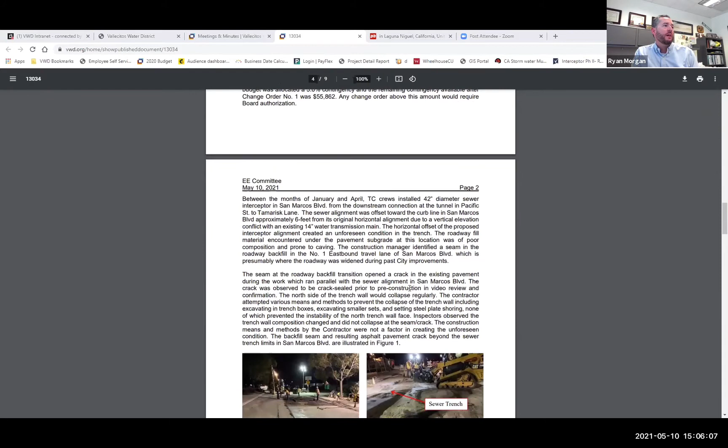Working in San Marcos Boulevard was a bit of a challenge due to the soils in the boulevard and traffic control. We performed night work on San Marcos Boulevard to mitigate traffic-related conflicts during the day and for public outreach and things like that. But one thing in specific was encountered in San Marcos Boulevard with the groundwater and porous soils.

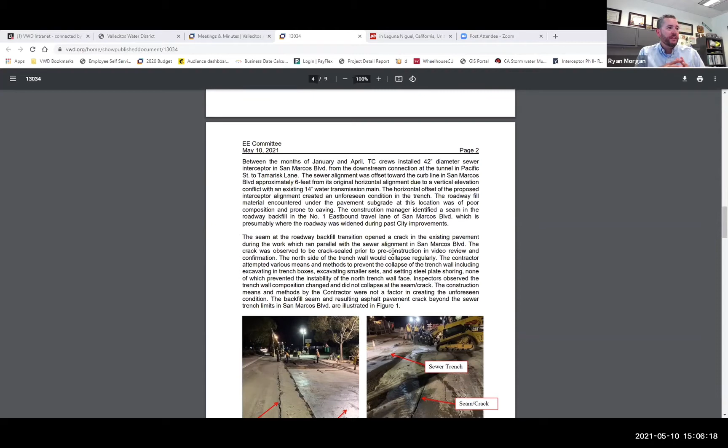It was noticed in the pictures on your screen that there was a seam that opened up in the roadway, a crack developed where there wasn't one before, or it was crack sealed in the pre-construction video. This crack migrated longitudinally down San Marcos Boulevard from Tamarisk to Pacific Street.

We think it was the joint in the road where it was widened back with a past city improvement project, so there was a distinct change in material and subgrade at this location. This created a problem in the excavation and collapsing of the trench wall. Typically the contractor is able to shore up the trench wall and preserve it to the limits required to open up for the sewer installation.

In this case, the entire travel lane of the number 1 lane in San Marcos Boulevard eastbound was opened, unfortunately, and the contractor attempted to use different means and methods to hold up the wall to prevent collapse. They were unsuccessful.

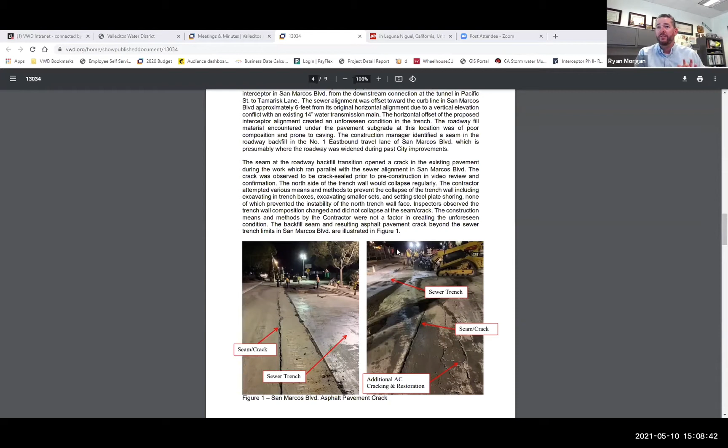This particular change order revolves around the surface restoration and the additional earthwork, excavation, and backfill in San Marcos Boulevard that exceeded our bid quantity.

That being said, we were looking at change order 2 in the rough ballpark of $136,000, which would take the total contract change order amount to 6.2% to date. I can report today that the actual change order 2 value will be about $88,000, which takes it to a total of 5.5%. So we're still going to exceed that 5% contingency.

We're still going to need board intervention here, or approval for this at 88,000. The 88,000 constitutes 4 or 5 different line items that are additional, including the AC pavement, which is the biggest, and backfill and excavation as well.

We do expect an additional change order number 3 to come in still in the coming months, because there was additional concrete removals and some manhole rehabilitation work, which we're still finalizing pricing on and making a decision whether or not to proceed with. But any amount of change at this point is going to exceed the 5% per the ordinance.

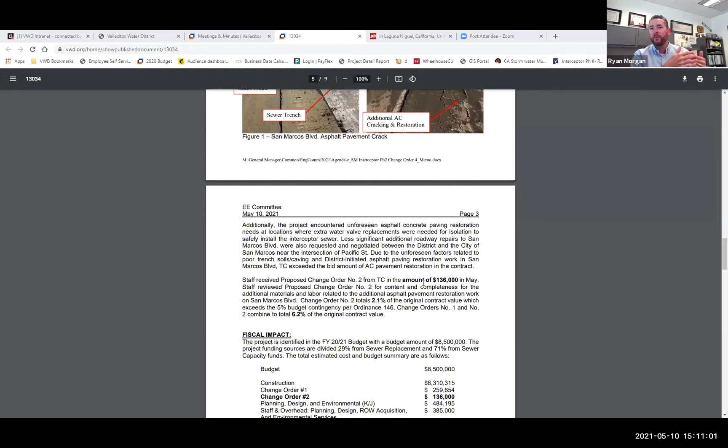As I mentioned, the fiscal impact is broken out a little differently. Change order 2, instead of $136,000, will be $88,000, or thereabout. We're still within budget, we still expect to finish within what's been budgeted, so we're not requesting any additional allocation to the budget at this time.

That will be flushed out in full once we know more about change order 3 and what's coming to close out the project. So with that, we will be seeking engineering and equipment committee support for this item to go to the board of directors on what will be the May 19th board meeting, for the authorization of change order number 2 in the amount of roughly $88,000.

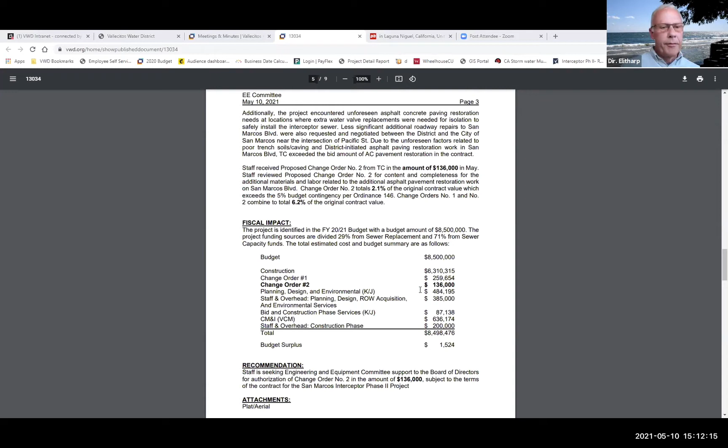And if there's any questions or discussion, I'd be happy to address that now. Okay, thanks, Ryan. Director Hernandez, any questions? You're on mute, Director Hernandez.

I'm still a little confused. Ryan said it was 88,000. I got 136,000. Is that differential explained somewhere?

No, when we were putting the agenda together, the estimate was 136,000, but we were still in negotiation and still verifying quantities with the contractor, and we didn't have it as of Thursday. So we knew we'd be working on Friday, maybe even Saturday, to get the real number. And the number came in lower once we verified, checking our notes and our inspector's notes.

Some of it was already in the scope for them to do. At the end of the day, it was less than we thought, but we put the worst case number up there because that's the only number we had on Thursday.

You're going to modify the report for our board meeting? Yeah, it'll be captured correctly in the minutes of this meeting, and then for the board meeting we'll put the correct amount. Very good, thank you. That's all I needed.

All right, we certainly have my support for this change order. I've found with large pipeline projects, the most challenging part's always been the street restoration. So I think this is commendable. You've held the change order amount in the 5 to 6% range. So you've got my support, and I'll defer to Director Hernandez for his support.

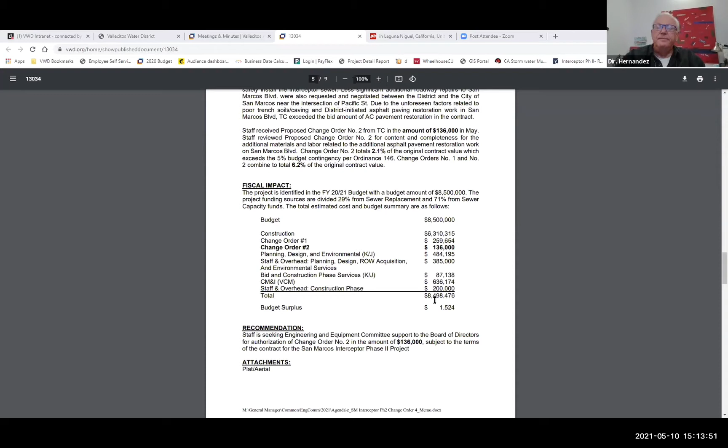Yes, absolutely. Okay, thank you.

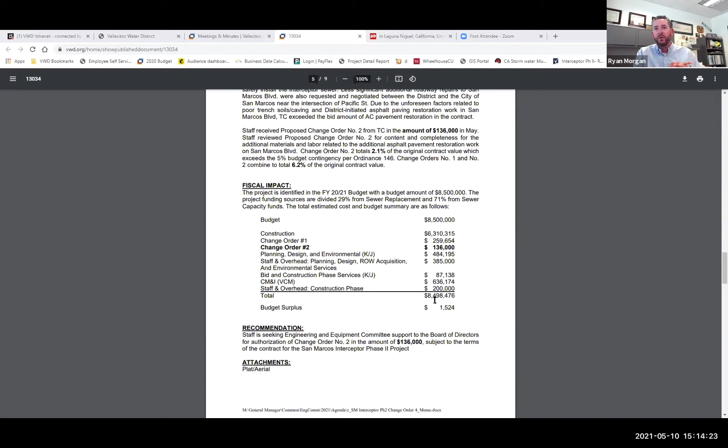Thanks, Ryan. And I'd just like to add that we know one of the best things we can do to leave behind is a nice roadway on San Marcos Boulevard. It's very heavily trafficked. That's one area we didn't want to cut any corners in. We actually took some areas that were damaged, not from our project, but we negotiated with the city because they wanted us to go ahead and make that repair now, and we agreed. So the goal was really to leave the boulevard a better place than we found it when we started.

Yep, absolutely. Oh, good. Yeah, and even though the finished paving isn't done, it was nice to get that extra eastbound lane opened up on Friday. All right, okay, thank you.

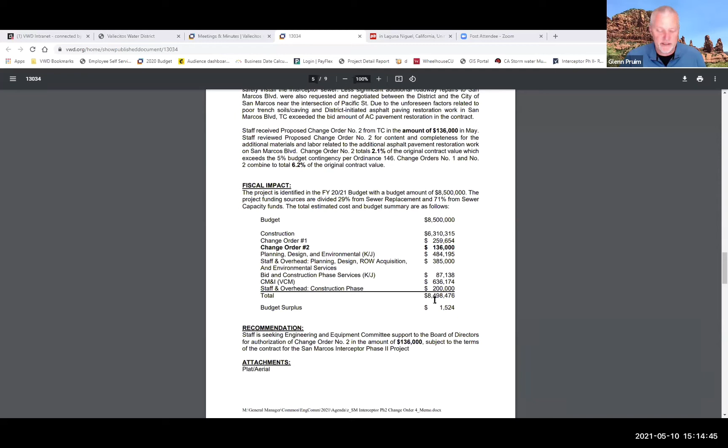So this item is the Las Posas water line replacement project. And I think this is the first water main break that we had when I started back in late 2016. I don't remember the exact date for this one. It was probably November or December of 2016, something like that. And now we're getting around to making final repairs here.

Is this the one where the cable company skewered the pipeline? No, that is not. This one actually, it was a pipeline break at the trapezoidal section right there, right when General Manager Prum started actually.

Okay, and this is the one where we had to get our crews. And it was so deep, and we didn't have the equipment. We actually had to widen the road and bench our equipment in down below the road surface to even get down to it. So we put a quick repair in. I'm stealing most of Ryan's thunder here, so I'll stop. But we put a quick repair in just to get us by, and then we're going to schedule for a full repair later on. And then with budgets and then COVID, we just kind of pushed that project back. But you'll see from the pictures, we'll probably have to get to it because it's kind of a ticking time bomb. Sorry about that, Ryan.

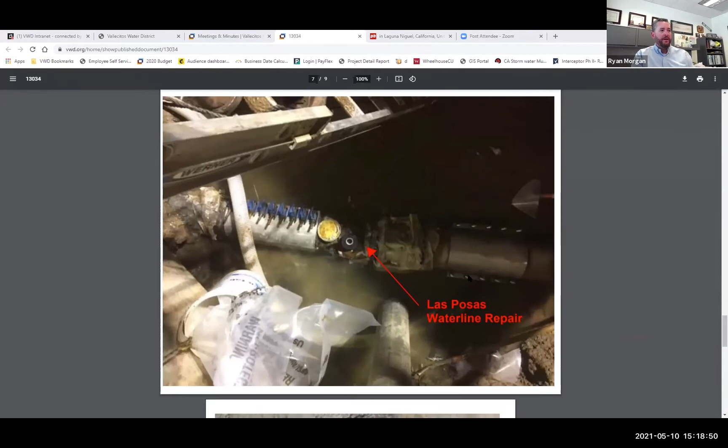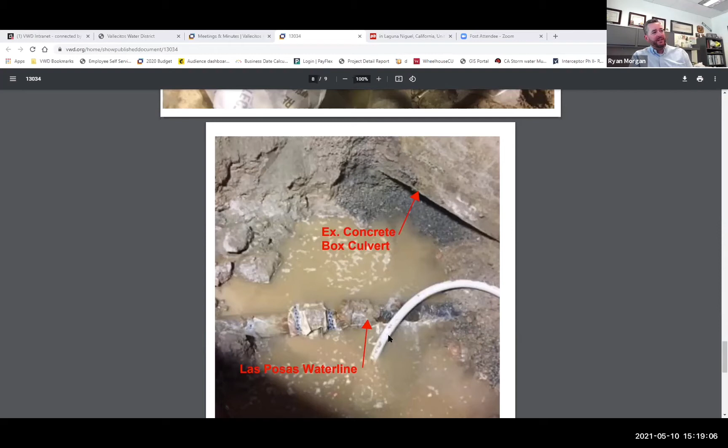So here's some pictures of the repair, Las Posas waterline repair with the clamps James was mentioning. And this one here actually shows the culvert and how it was beginning to be undermined. And the ductile iron, which in my understanding is not in the best shape.

That being said, we've already drafted an RFP, and we've invited two consultants on our as-needed civil engineering rotation list. We have requested letter proposals for design and professional engineering services for design and bid phase services. We expect to receive those proposals at the end of May, and depending on the fee associated with those proposals and whomever we select, this item may be coming to the board in June, probably by the June 16th board meeting, seeking an award for that PSA or that task order.

This is just an informational item for the committee about what we have, probably the next engineering design award that we have going to the board. So this way the committee is aware and can also ask questions.

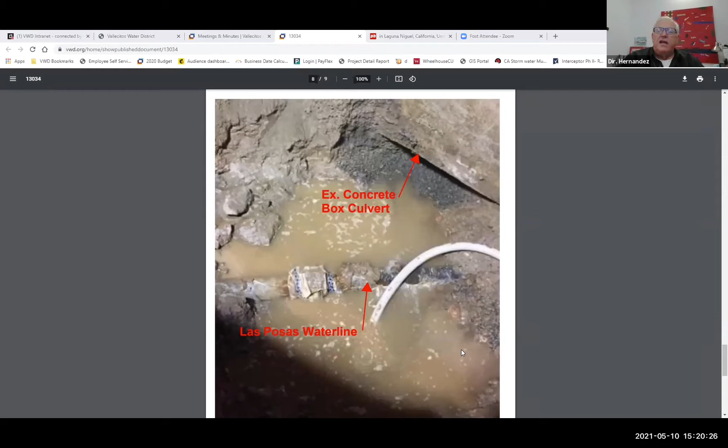This Palos Vista Drive, where is that at? Yeah, that's a typo, we actually fixed it, and I believe the wrong one ended up getting posted. It's supposed to be Las Posas. That's Las Posas, and that's Las Posas in Linda Vista. That building by itself is a Grainger. Yeah, that's right. No, James, I thought that was the case, but yeah.

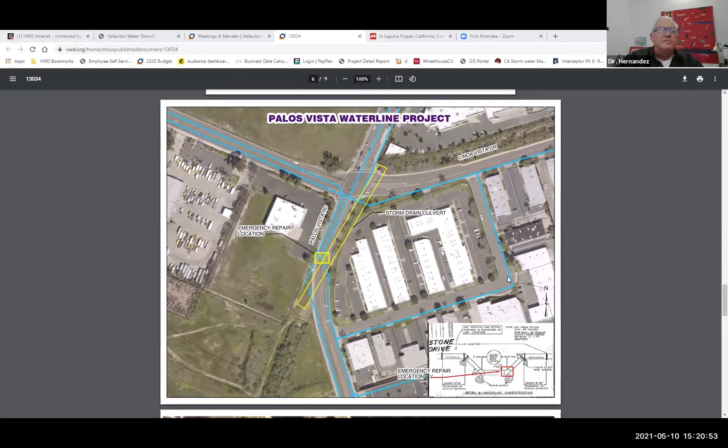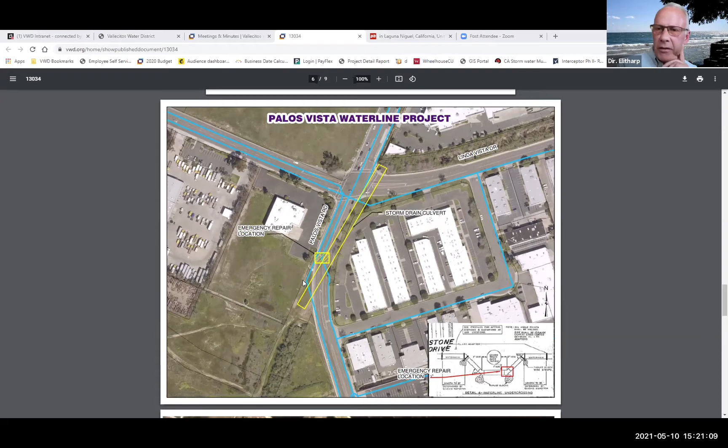Sorry, Director Elitharp, yeah, I was thinking of another break, wasn't there an issue with somebody boring underneath in the same area? Yeah, this was a little closer, maybe it was a sewer line. No, it was a sewer line, but it was a little closer to the movie theater. The dry utility contractor bored right through our water line and our sewer line, but they end up paying. We got a contract out there, and they end up paying 100% of that fix. Gotcha, that's the one I was thinking, that was that one. That was just down the road, just a little further to the south. Gotcha.

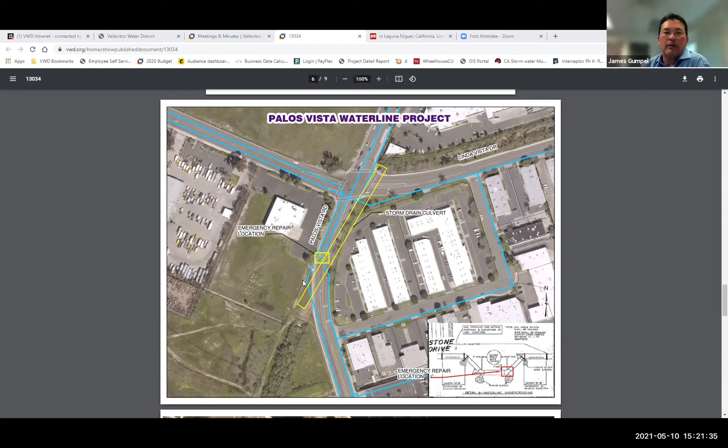Yeah, so the next item is an overview of our GIS system. It's obviously an essential component of our asset management program. So I think Susan's going to kick us off, and then she's going to maybe turn it over to Paul Cosmano. So Susan, why don't you jump in?

Great, thank you, General Manager Prum and directors. We are here today to give you a little overview of the GIS system. It's a critical component to the district's ability to understand the assets that we have and where they're located. Joining me today are our two GIS technicians, Paul Cosmano and Dan Lopez. They're going to be giving you the demo after I run through this PowerPoint real quick. So Paul, if you want to go ahead and share your screen.

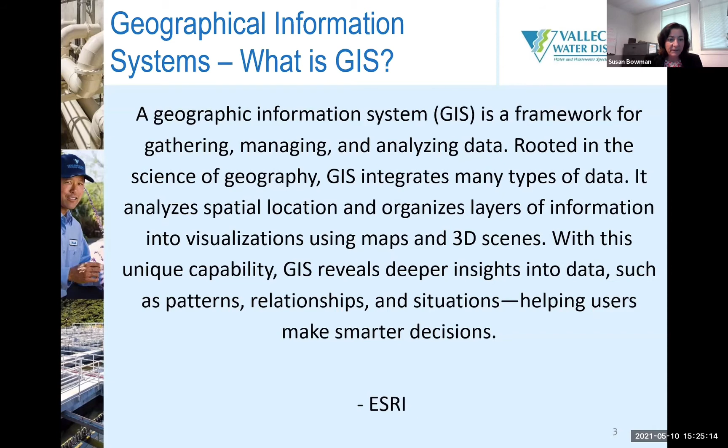So again, GIS gives us better insights into the data here at the district, a better way to see our assets and understand where they're at. It's really just a critical component to being able to provide our services to the customers. So next slide.

Okay, so where does it fit into the overall asset management concepts? This is a slide that I've used to bring together what asset management is and what the different components are. This GIS system really is part of the first two components of what asset management is.

What do we own? What are our assets? As we were talking about in the previous presentations, we need to know what we have, and we need to know where it's located. Majority of our work is field work, on the water and sewer lines, not within fence lines, although within fence lines of a treatment plant like MRF we do have GIS. Primarily GIS being a map-based system, it tells us where all of our assets are located very precisely and how they're related to each other in how the system flows, collecting water, delivering water.

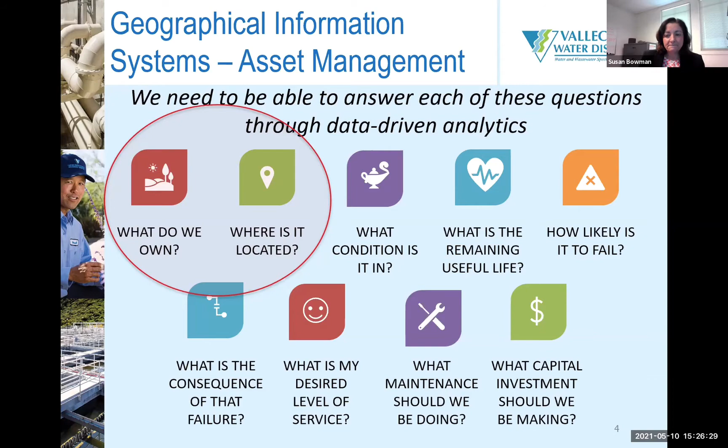Next slide. Okay, so again at the district, the base maps we use, the primary maps, are water and sewer atlas maps. That's just the term we refer to them. Paul and Dan will be giving you a little glimpse of those. And then we have other applications that are targeted towards specific aspects of our business.

Meter reading map—Paul's going to show you what we're doing with meter reading. The division map, where we show the different directors' coverage of their districts. We have a main break layer put in place to help understand where main breaks are. We have applications that help our maintenance crews execute maintenance and keep track of what they've done and where. Some of these pictures here, the yellow pins, you'll recognize are from...

...the soil analysis work we're doing down in San Elijo Hills. And on the left there in the purple colors are where we had done some risk analysis of our ductile iron pipe that we were just talking about—risk analysis of different areas around the district so we can focus our condition assessment efforts. But again, these are things used throughout the district. Everyone needs it to accomplish whatever aspect of their assignment.

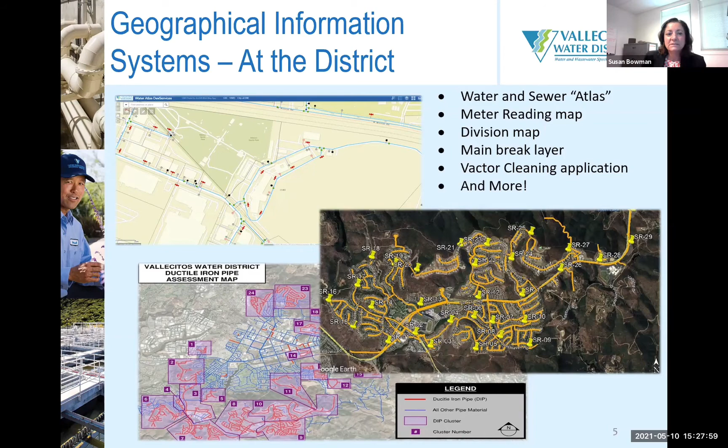So next slide. Okay, so future efforts. What we're looking to do is expand accessibility to the GIS system through mobile access and integration with Maximo, our maintenance management system.

Currently we have our assets in the GIS, and the assets are also recorded in our Maximo maintenance management system. This next year, we're going to be identifying the core needs to integrate those two systems together so that an asset in GIS is updated on a nightly basis to the assets and maintenance history in the maintenance management system. So that's a big effort we'll be undertaking.

And with that as well, it'll allow us to get GIS out in the field to all of our field workers. Currently, supervisors and certain other groups that are very heavily GIS-based do have GIS access in the field, but moving forward we'll be giving that out to everyone on multiple devices so they're able to really track their work and understand where our assets are located.

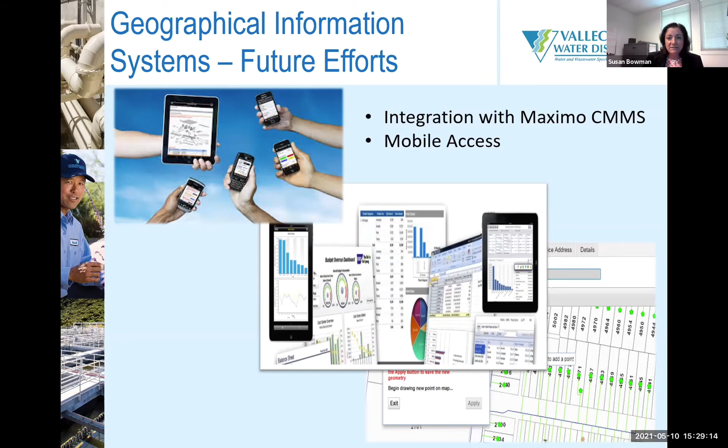So next slide will be our demo. At this point, I am going to turn it over to Paul and Dan. Paul's going to show you some of the tools we have on the water side, and then Dan will wrap up with some of the applications on the sewer side. Okay, thank you, Susan.

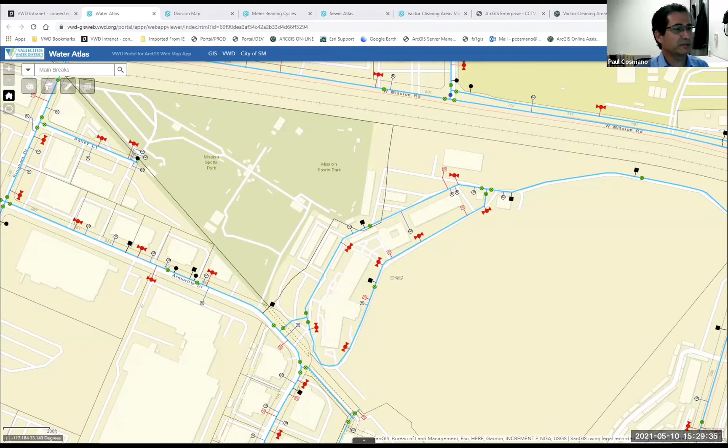Everyone can see the district site map? Okay, this is a portion of our water atlas map.

What we do is we're showing all our facilities, both in the office and out in the field. Every appurtenance in the system, pipe, valve, meter, whatever, has data associated with it. As you can see in this pop-up, this is the data associated with the water main I clicked on. We do have links to the as-built, which can only be accessed indoors at present, but we're working on getting that access mobile. So all the information in this map, whether it's a fire hydrant or a meter, it all has data associated with it, and we can click on it and quickly find it.

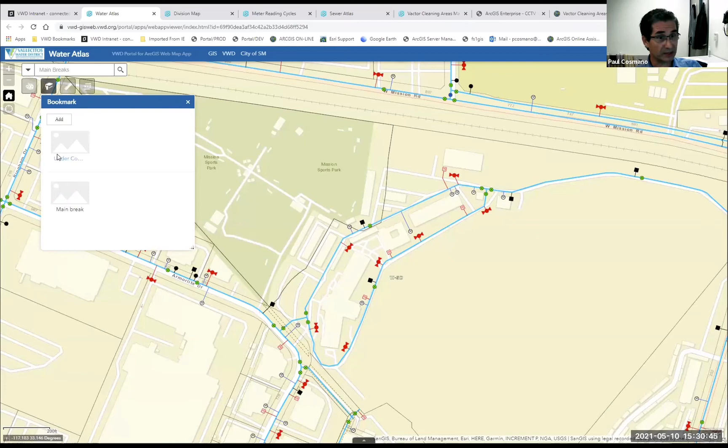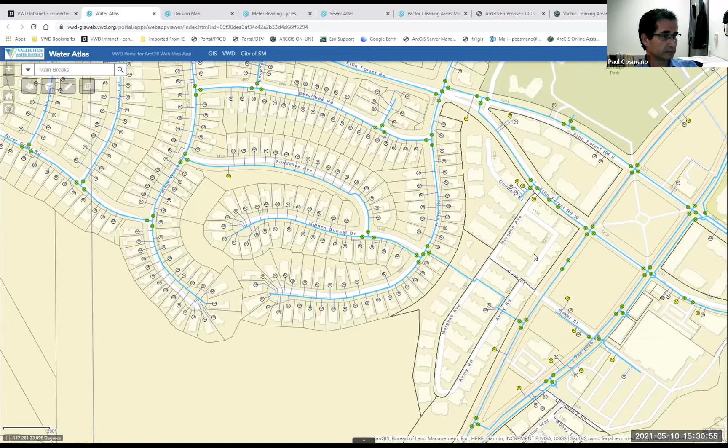Also, we do have the main breaks layer that we just added. It shows it's fairly recent, with the exception of the one we had the other day, and it also has that information. As soon as it shows up here, we'll click on one, and it'll have the lat-long information of where the main break was located. You can see here the cause, main break, lat-long location, the pipe material, and even the soil type.

So that's pretty basic. We have quite a few layers, only some of which are turned on. We have access to quite a bit of information that the end users can use.

The other map we have, this map is internal only, so only district employees can see this map, no public access.

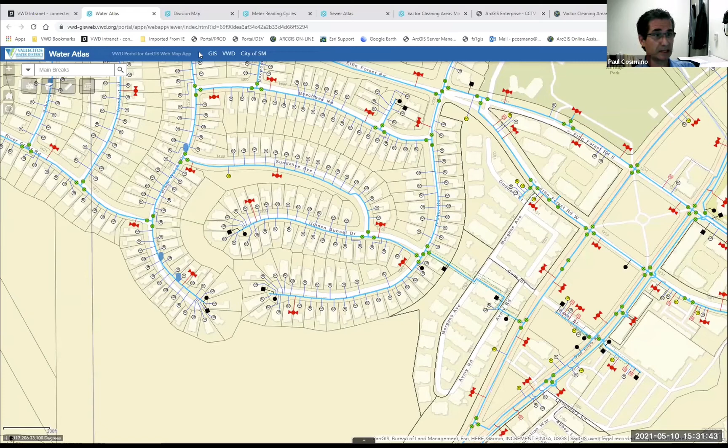This next map, the division map, can also be seen by the public. When they go to the district's website to open it up, they'll get this splash screen. It'll show them instructions on what to do and how to find their board member.

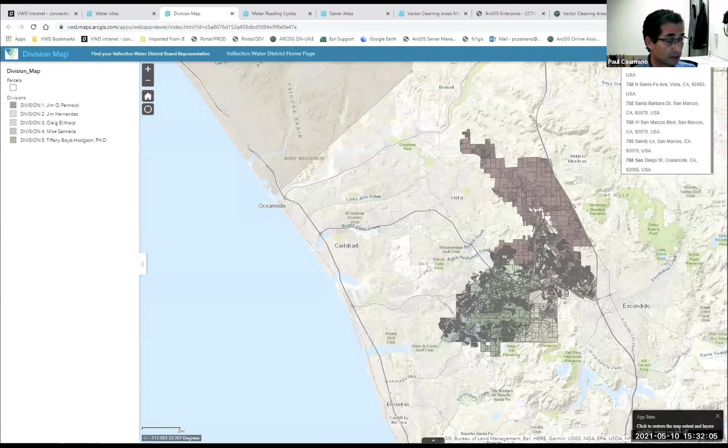Basically, you go up here, type in your address, for example Boulevard, and it'll zoom you to the location. You just click on the screen and it'll tell you the precinct they're in, the division number, and the board member's name. Again, this is a public-facing map.

One of the other maps we have is the new map we just put out about a week ago. It is accessible to the public now. This is for finding, since quite a few residents are asking, when their meters are getting read. So we created this in conjunction with the meters department so that anyone can find when their meter is going to be read at any time during the year.

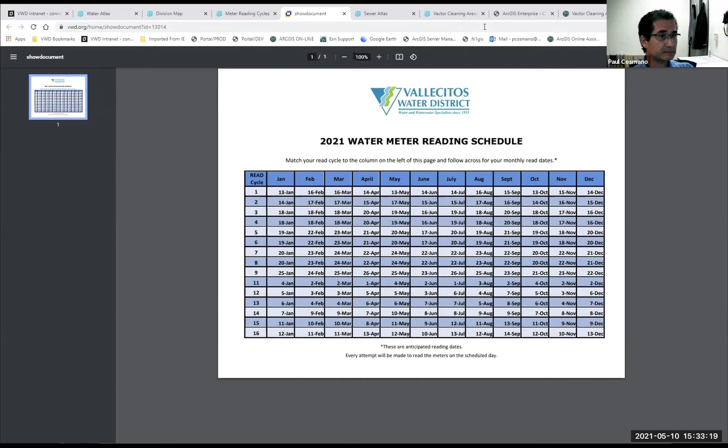And that's all I have. So I will go ahead and turn it over to Dan, and he will show you some of the other maps that we have.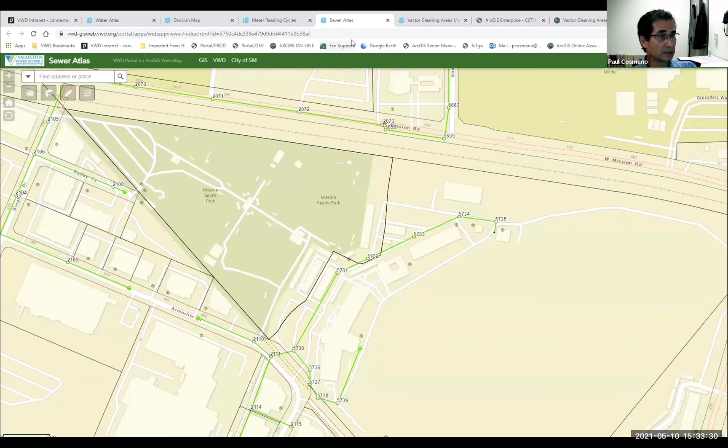Hello everyone, I'm going to quickly talk about a few other web maps that we have. They're available to district staff only, and these are typically on a desktop, but they're also available on a mobile device. I'll talk about that in a minute.

What you're looking at is very similar to what Paul just described in the water atlas, except now you're looking at sewer mains. If you're familiar with the area, you'll notice that's the district sewer mains that front the district office, and then the surrounding areas as well.

If you'll notice, the sewer mains and then the manholes are labeled for reference. If you click on a sewer main like this, you'll get all the pertinent information associated with that sewer main: upstream, downstream, elevation, invert, diameter, length, things of that nature. So it really gives everything, all the information, to the end user, including a link to the as-built itself.

And so there's the information for the sewer main. If you were to click onto a manhole, you would get similar information, all related, of course, per the attribute associated with the manhole.

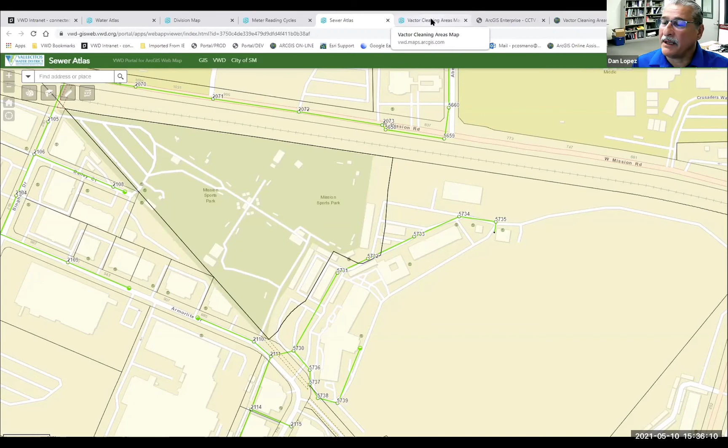That's it for the sewer map in a nutshell. Let's go to the vector cleaning map. The vector cleaning application map is simply a mobile application used out in the field by the collections department. This particular map is used for vector cleaning tracking, if you will.

You'll notice the two different colors on the screen - the sewer mains that are green, and then there's some red ones. The green ones, for the purpose of the vector crew, indicate that this sewer main has not been cleaned. Once they vector clean it, it will change colors, as you see here. You click on that and it displays all the different attributes regarding that sewer main - when it was cleaned, the date, the operator, truck number, things of that nature, which they use for tracking purposes that they have to keep track of. This is part of their yearly routine of cleaning the district sewer mains.

So Dan, yes, it resets every year. So those green pipes may have been cleaned a year ago, but then it resets. Correct, every year. Okay, correct.

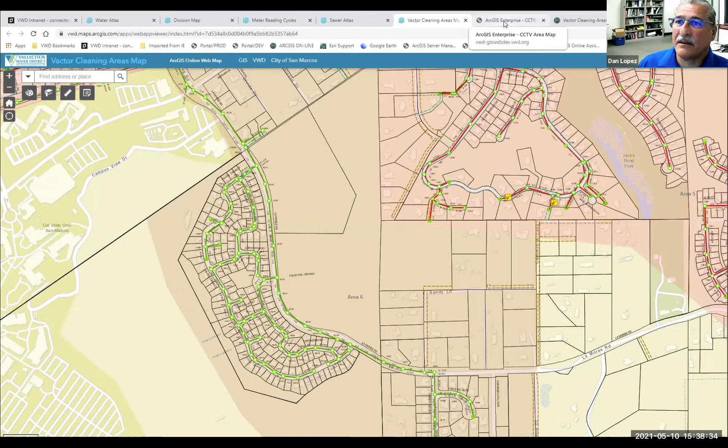And we're going to go to another map, which is similar to the vector cleaning map, except this is for the camera crew. It's a CCTV application, again in the collections department, but this is for the camera crew. So what we've done here, the green specifies all the typical information that you get on the sewer atlas. This one, because it's green, it still stays green, meaning it has not been cameraed.

Now, if you were to click on it once that sewer main is cameraed, you will get the additional information, including when the sewer main was cameraed, when it was edited, who the operator was, the footage, and things of that nature. In the near future, users will be able to link to the actual video of that sewer main.

Again, this is for tracking purposes, so it helps them track what's been cameraed. The district archives those videos, and we're in the process of having those videos available to the end user, primarily for the collections department. So that's pretty much it in a nutshell on that one.

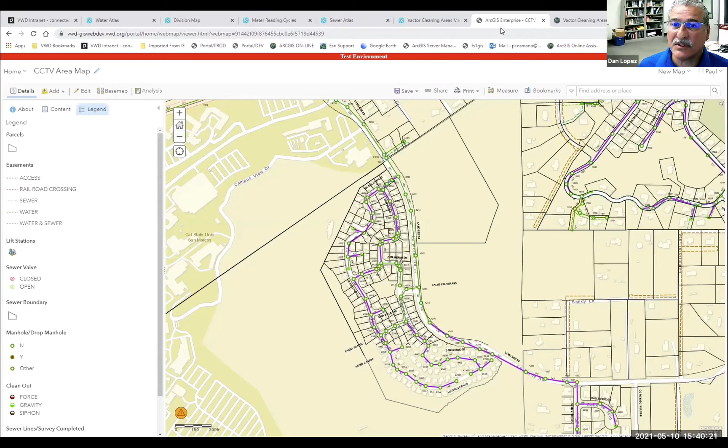Are there any questions? I do, Susan. I didn't see the first page - is there a legend of what the symbols mean so the public can go and see that a round circle is a manhole, one with a cross through it is something else?

So the public doesn't have access to the one screen that has all of our appurtenances and all of our assets. There's some public access to that information though. On the public facing maps, there's a legend on the left-hand side of the screen that tells you what the colors and lines are. They're very basic for the customers. I figured as much. All right, thank you. You're welcome.

Okay, well, thanks, Susan, Paul, and Dan. Very informative. I can tell you from experience that having access for the field crews to the as-built is extremely valuable and helpful. So that'll be a great feature.

Currently, we download the as-built onto their mobile device, but it's not live. This is all part of that integration that the committee has seen, how we're moving asset management along and bringing that computer maintenance out to the field. GIS is an integral part of it, and as the guys already stated, they'll be able to click right on it and see the CCTV or the pertinent information. It should make workflow and gathering accurate information a lot easier for them.

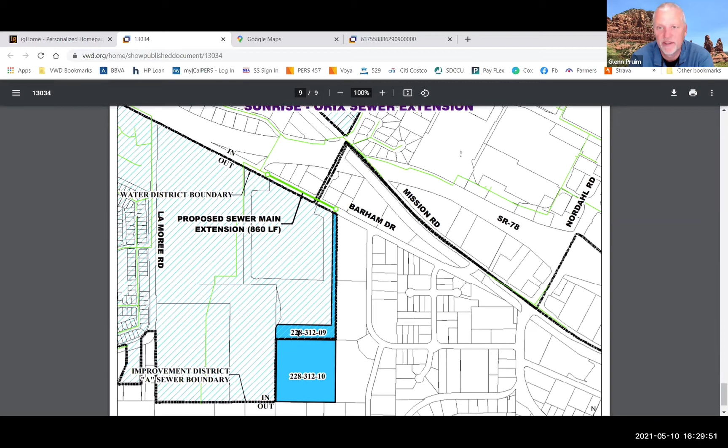Well, if it's okay with the committee, what we'll do is try to get a better idea of the cost. So if we were to explore this alternative where we maybe look at helping pay for the upsizing, we can sharpen our pencils and get a better idea. But from a timing perspective, I'm not sure when the developer is going to want an answer—sooner or later they need to move forward or not.

Okay. James, is there anything else you needed? No, part of me was hoping for James to just say go in this direction, tell the developer this, because it makes my life easy. But we'll go ahead and sharpen our pencil, and we'll probably be bringing this back to you next month, because I think the developer wants an answer.

So I think you can tell them what we're leaning toward, and that's that we're going to sewer them, and that we're interested in maybe some kind of upsizing scenario. It becomes a cost issue—I know the developer's consultant is very reasonable, but I believe the developer wants us to pay for the whole thing, and I've already said a hard no to that.

Yeah, there's no justification for it. You can tell them that again.

Okay, I'll work on some numbers with Glenn, and depending on the timing, we'll see. You'll see it at the next committee, if not before.

Before you go, James, would you also look at what a bond amount would be that would, if you only got 25%, and you have to go after a bond, what number of bond you would look for, and say okay, give us a $10 million bond, and then we'll know what we're doing. Yeah, I will, but you can't hold bonds to perpetuity, that's one of the problems, right?

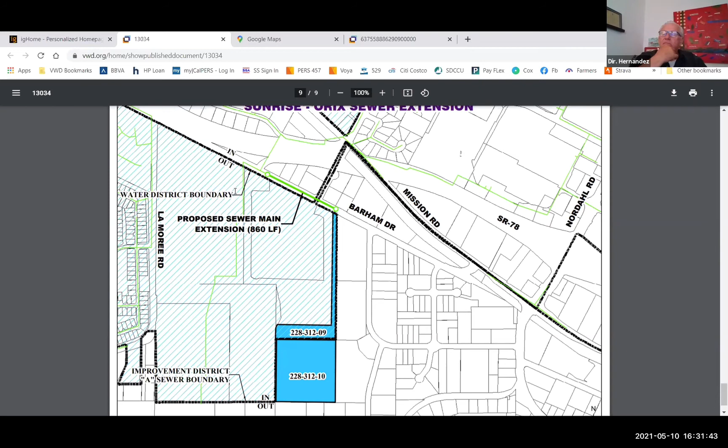So you could hold surety, like notes and papers and real cash, so to speak, to perpetuity, or you could put something in escrow, but you can't even keep something in escrow to perpetuity. It has to have a sunset date. So the problem is the sunset date. So you could have a $100 million bond, that bond's going to have a sunset date, because nobody's going to give you a bond for, let's just call it $1 million, that goes off forever.

Okay, so it becomes kind of a non-issue with that, because we did explore that, Director Hernandez. All right, okay, yep, all right.

Go ahead, there's one more item left. Yes, one more item left.

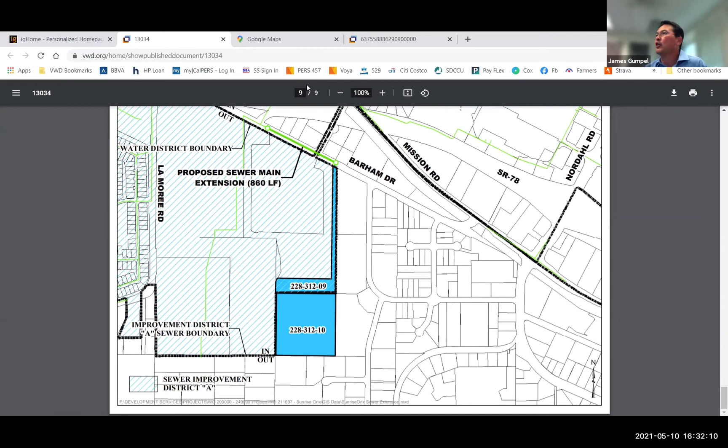So the urban water management plan, and since I'm sharing, I'll continue to share. Hopefully the committee is aware, if not, our urban water management plan final draft is online. We've advertised in the newspaper. We're gearing towards the public hearing, which will be in the first board meeting in June, which I believe is June 2nd. So that's going to be a busy board meeting, because we're going to have hopefully a budget adoption in the first board meeting in June, and we will have the public hearing for the urban water management plan.

Now, the good news is the 2020 urban water management plan is significantly different than 2015. It's different because of statute and state regulations and rules, but also because our water supply outlook is significantly different.

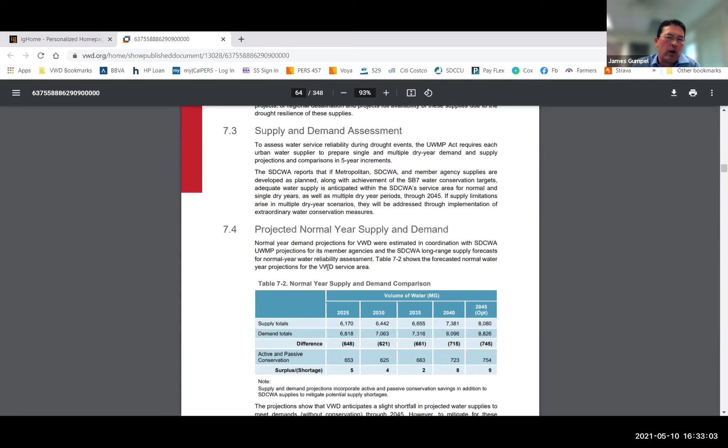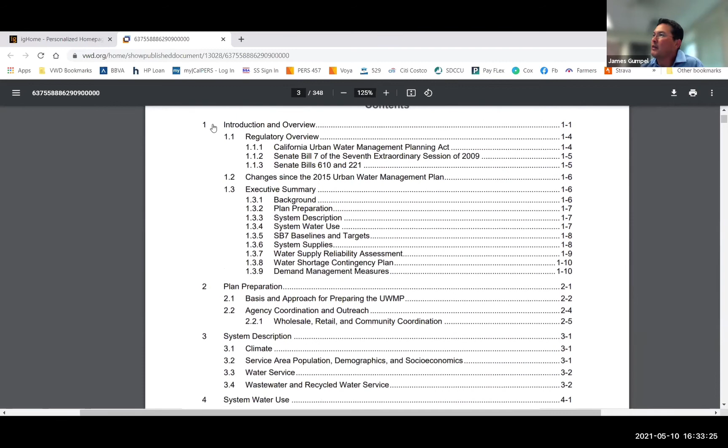The new components to it, I'll kind of jump back and forth, this is what it looks like, so everybody can see, let me zoom up a little bit, hopefully give you a bigger picture. And then on our table of contents, it's basically the same type of table of contents as every other urban water management plan, with the water system being chapter 4.

Our SB7, or basically our gallons per capita per day targets, being chapter 5. And as you may remember from 2010 and 2015, almost all agencies, at least locally, have no issues with the SB7 goal, which was initially put in by Governor Schwarzenegger, just to kind of date it back.

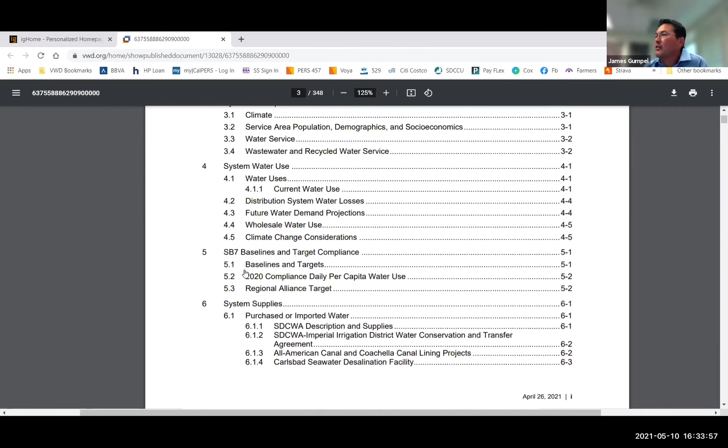System supplies are in chapter 6. Now for us, our system supplies is essentially water authority. So this is basically lifted from the water authority's draft urban water management plan, geared towards us for our numbers, and placed in. So we really have no additional say in it, because even our desal is a water authority supply, and even our water from Olivenhain is an indirect water authority supply, because we get the raw water from water authority. We pay for treatment services at OMWD, if that makes sense.

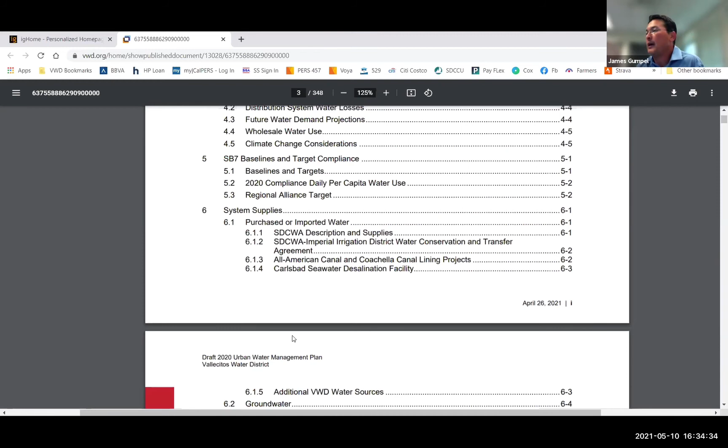So chapter 7 is really, as chapter 8 is our water contingency plan. So this is the part that's really new, but really it has to do with, and I'll explain where it affects us. But this is the part that's been kind of highlighted. So each urban water management plan update has something that they're really pushing forward, and our water shortage contingency plan is it.

Now the good news for our county is we don't have any, we don't have none, so it becomes a non-chapter. And when I go into some of the tables in chapter 7, which is our supply and demand, I'll go with that.

But what it does do, and this is something we'll have to bring back through the general manager to probably our PAP or P3 committee and to the board, is we do have to probably make some amendments to our drought ordinance, because we have a 4-stage drought ordinance, and the new water contingency plan and the new state regulation requires a 6-stage drought ordinance. So we have to go from 4 to 6.

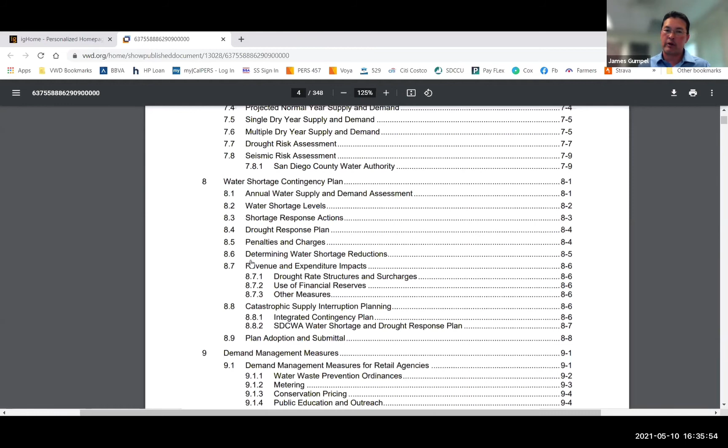It doesn't give you guidelines of what you have to do. It's just different triggers. Trigger 4 and trigger 5 may have nothing different that Vallecitos does, but you have to identify them because it'll match the state triggers if we go into a severe drought.

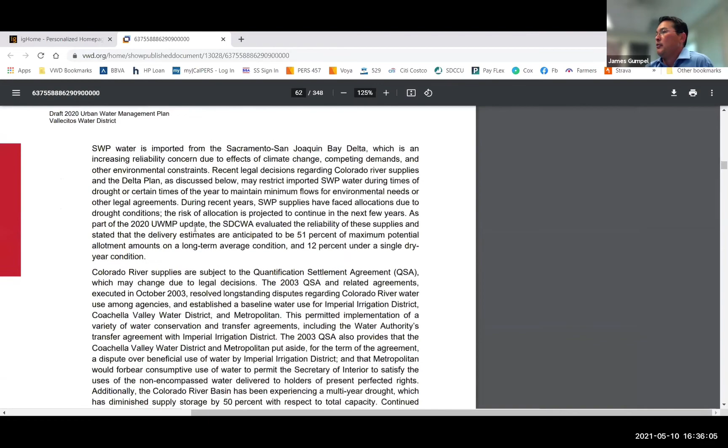Anyway, not to take up too much of your time, let's go into chapter 7, water supply reliability. I'll go right to a couple tables and explain them and the differences between them. Okay, table 7-2, projected normal year water supply totals.

2025-30, you can see the different years, water supply demands. Now I'm going to put in a note down here. There's going to be 2 notes, maybe 3 notes. I just got off the phone before our meeting started with the HDR consultant.

The water supply totals are given by Water Authority, and they include anticipated conservation measures, both active and passive. The water demand totals, provided through Vallecitos via our master planning and our own urban water management plan, do not include passive or active conservation measures. I'm going to put that note, clarify this, into 2 different notes right here, so people understand it.

This is the table that people complained about last time because it showed a 35% reduction. Here, it's more like 10, 12, 13%. So it's not 35%, the numbers are much different.

The third note I'm putting down is that the water supply totals are the projected totals. It's not actually what the Water Authority has for water supplies, because they have supplies above and beyond that. They're just saying this is what we anticipate based on conservation goals we want to hit as a region. So that gives us, on purpose, our conservation goals based on a non-conservation number to hit for our future planning, which dovetails into chapter 8 and chapter 9, the best management practices stuff.

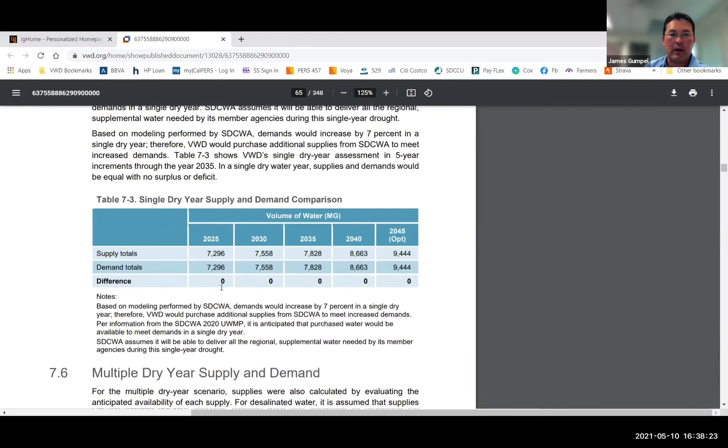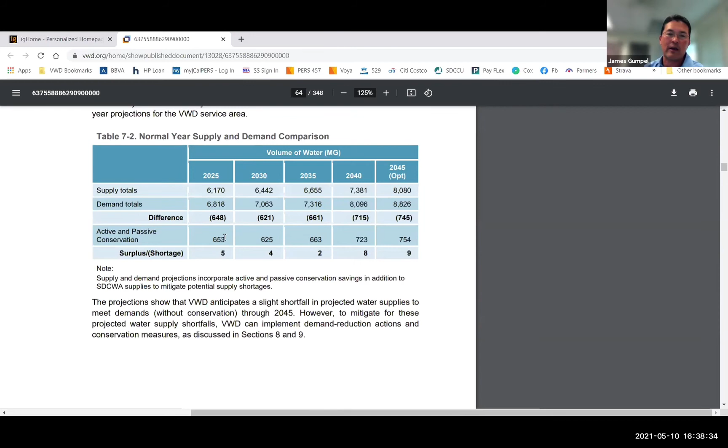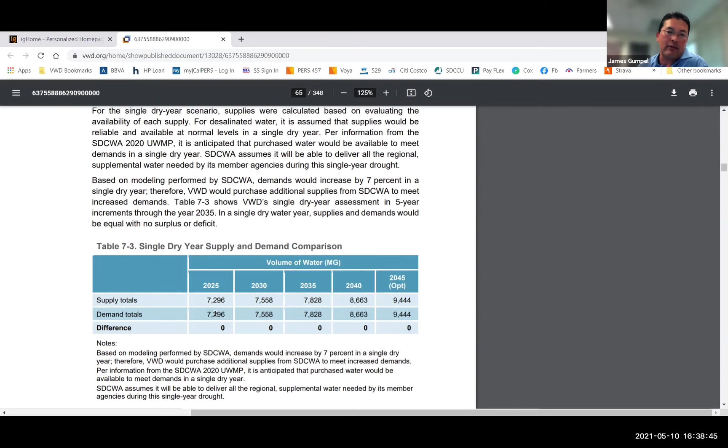So if you look at this number, it's 7,296. If you look at a normal year number, our demand is 6.8 and their anticipation is 6.17. So you can see we go up significantly, almost 1,000 million gallons. They still have supply for us, so the supply is there. This number is not an indication of the actual supply, it's an indication of what they anticipate supplying us, if that makes sense.

When we get into multiple dry years - James, yes, I got a quick question on the table above this one.

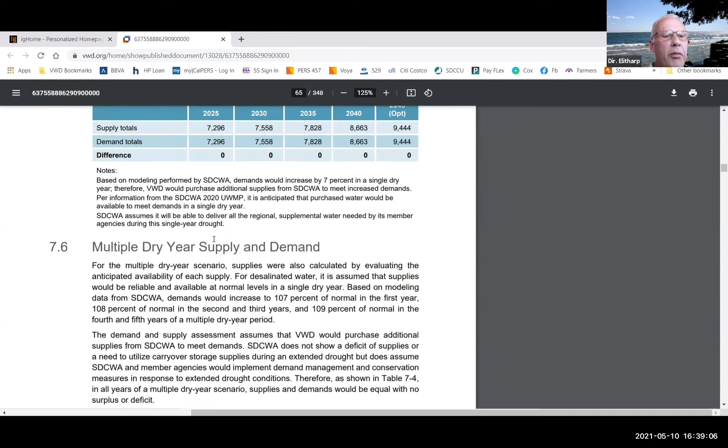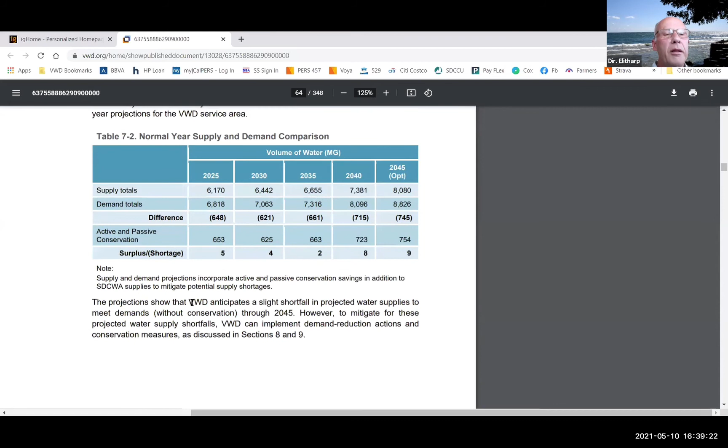No, let's go back down. This is the multiple dry years table. What's the table above? That's a single dry year, and the table above says normal year. Okay, I guess the normal year, yeah, that one right there.

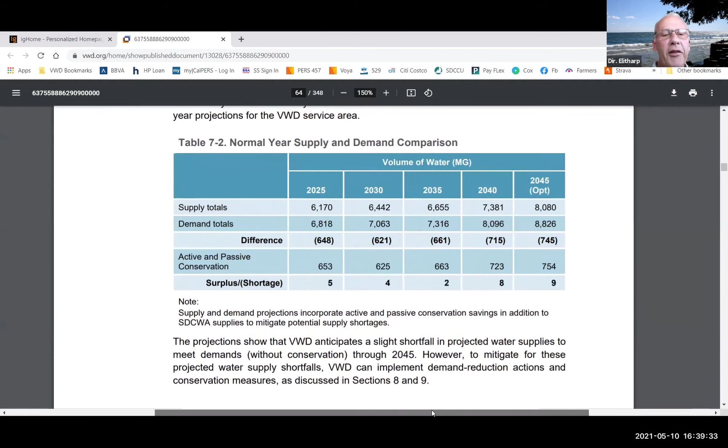So why wouldn't you just show conservation as being the 648? Why is there a small - I mean, what are the active and passive conservation numbers based on, and why are they different? They're just normal conservation that every agency does. So in other words, is that just a straight percentage on the supply total? No, I don't know exactly, I have to look into it.

CWA goes through a couple different scenarios to come up with it, basically looking at historical conservation numbers that each agency reports through its reporting structure and projecting it forward.

This is the table that you may remember people complained about. When it went to the state, Vallecitos did it right, while many other agencies had to show the deficit, because the intent of this table is to show the agency and the people reading it that you're going to have to do some sort of drought, passive and active water conservation, and here's a goal of what you're supposed to try to hit. The state came back to agencies that showed this as a 0 because water supply was available, or they projected their existing or projected conservation numbers into this number to make it lower, to make it 0.

The state says you're doing it wrong, because looking at this document you don't have an understanding of what amount or percentage of conservation you need to do. So that's why I'm going to take care of it with notes. Yeah, it just looks a little funny having surplus numbers in such small quantities, I guess.

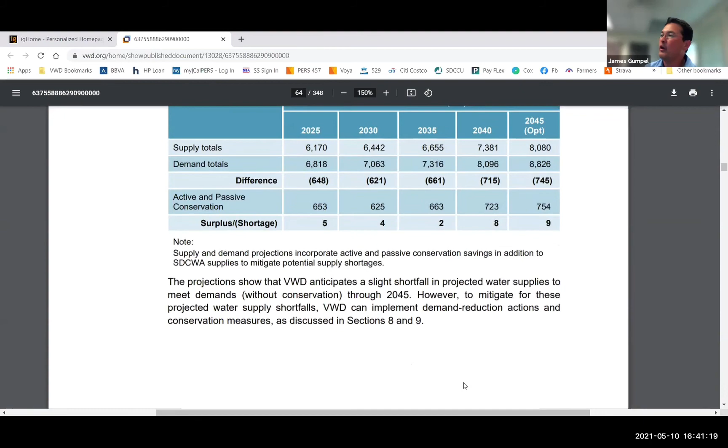It's really telling when you look at this over multiple years, as you can see our demand keeps going up, but the supply matches it perfectly.

Basically, CWA has different levers. If you look at their urban water management plan online right now, they're not even going to their highest lever, not even triggering a lot of their emergency statutes. They're so well prepared, according to their study, that even in the 5th year of a drought, they have abundant supply to meet increased demands without going to the next level of levers, getting water from groundwater basins and different emergency options they could pick.

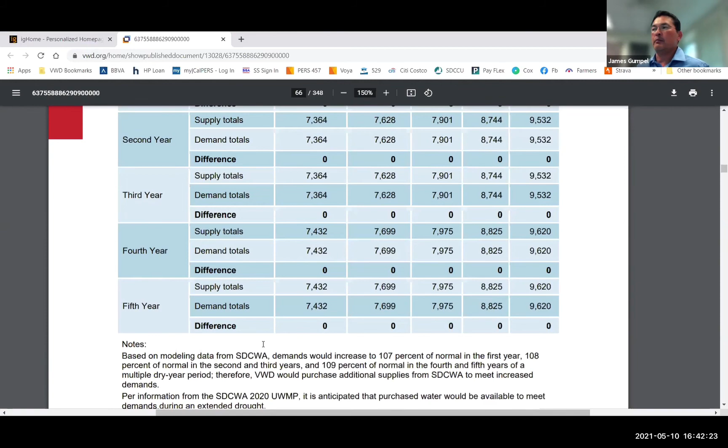So that's why the number is 0, because they're basically saying, that's what you need, we can match it. So the number will always be 0 the way the tables are set up. In other words, their number might be 9,000 for us, but they're just going to say we can match what you have. So that's really the majority of what I wanted to talk about, to show you that the numbers are starkly different.

This number up here showed like a 35% difference. The new numbers now, because your averages get to move with time, and now we have some of the reality of the recession and the past droughts within our 10-year average number, and it shows.

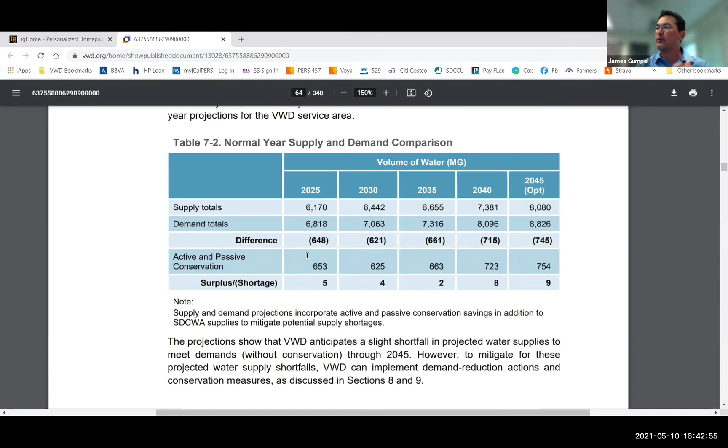Because remember, you have to base things on 10 years. If you go through the document, it'll talk about the increments and how the averages go through. It becomes clear that your numbers are based on these rolling averages, and you get to roll the average forward or back depending on what you're doing.

But at the end of the day, the message and the notes will show that there's an abundant supply. There's no water shortage anticipated by CWA, and even if we don't hit our conservation goals, the water supply is there. Not hitting our conservation goals may have other effects from a state standpoint, the carrot or the stick, but from a water supply standpoint, we have no issue.

That's all I had for this. If there's any questions, I'd be happy to answer them. The document is online. There will be a presentation at the public hearing done primarily by HDR, our consultant, to go over the document in more detail.

I wanted to give the committee just a flavor for where we are, which is basically the 2 main things I want as a takeaway: water supplies, according to CWA, are there, and considered reliable based on the statutes, and we don't have anything to worry about as far as our existing customer base or prudent, organized planning for future development.

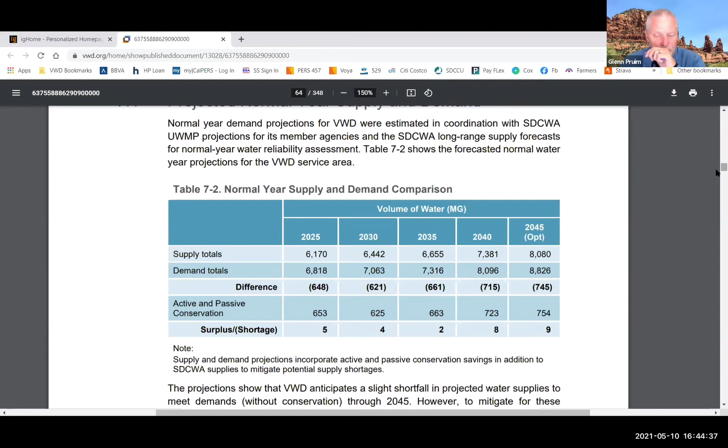And the second thing is, we will have to have some action. We will have to come back mainly for a new drought ordinance, because our existing drought ordinance doesn't meet the new statutes. At the meeting on the 19th during the GM report, I'll announce that there's going to be a public hearing, so we'll give notice on that.

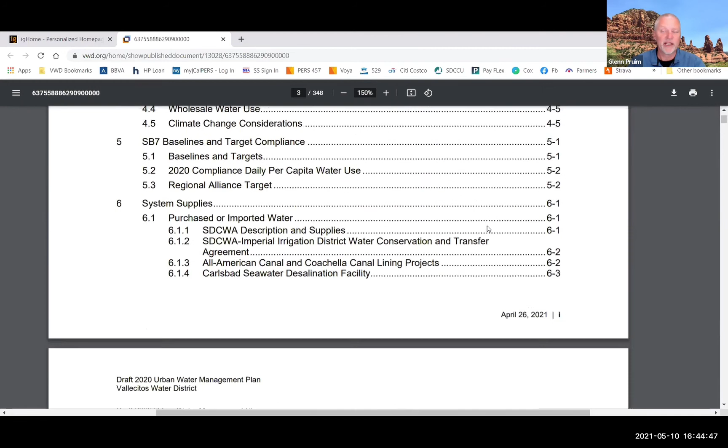Regarding the conservation thing, even though we may have been right last cycle, it's always uncomfortable when you're standing by yourself in a field, right? Yep. So I'm hopeful that more agencies are going to be in line with the way we're presenting the information, so there's not that uncertainty where everybody points to the pack and thinks that's where you should be.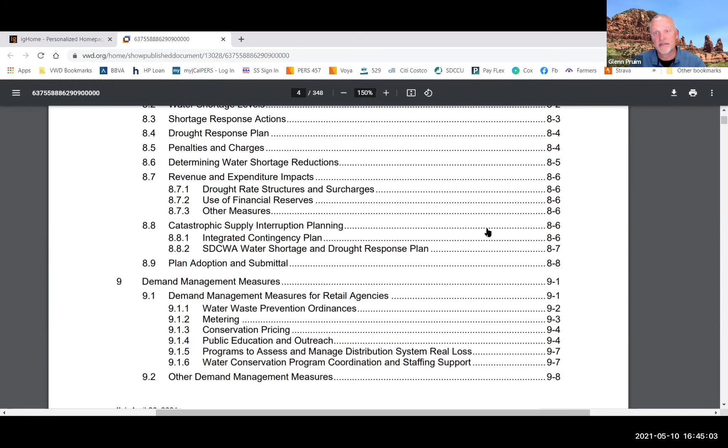Yeah, and I'm hoping the notes take care of it, and the state is kind of wrangling it in, and the fact that the numbers aren't drastic. 35% was a drastic number last time. This time it's not, it's 10, 11, 12%, or whatever it ended up being. It's not a drastic number.

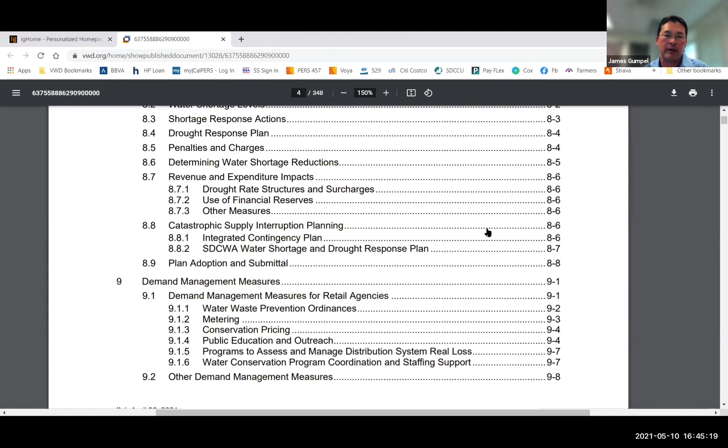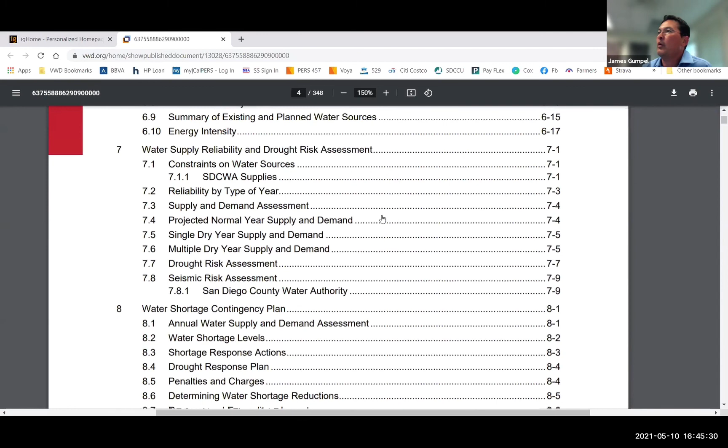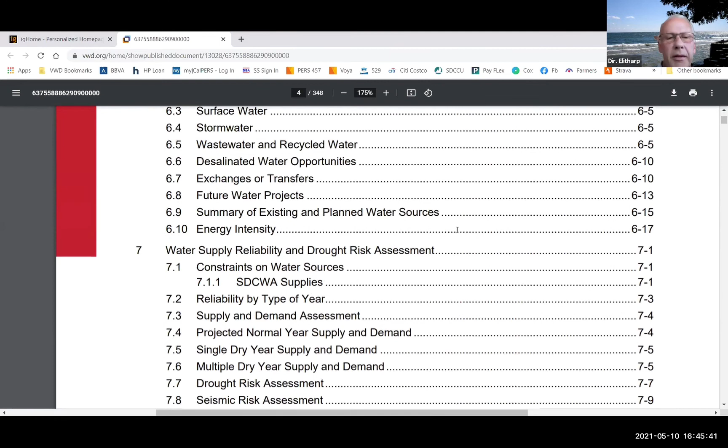Could you scroll up on the table of contents a little bit? Sure, what chapter do you want to see? I wanted to see where they list the CWA supplies - they have QSA, canal lining, a couple other things. Here's chapter 6, system supplies.

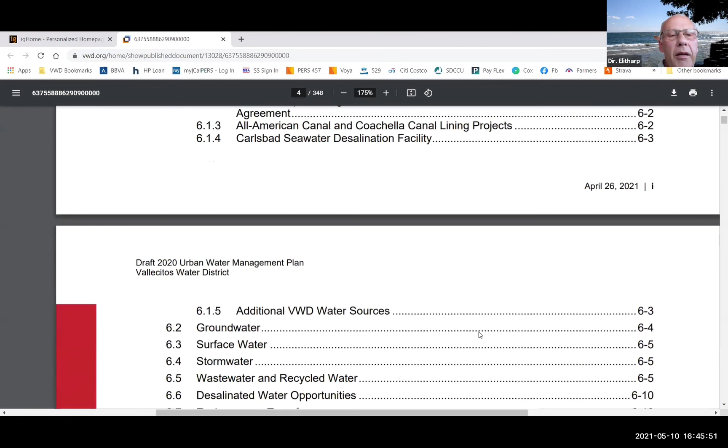I think it was in here. I don't see, just from the table of contents, but do they describe CWA's regular Met supplies in addition to QSA and canal lining?

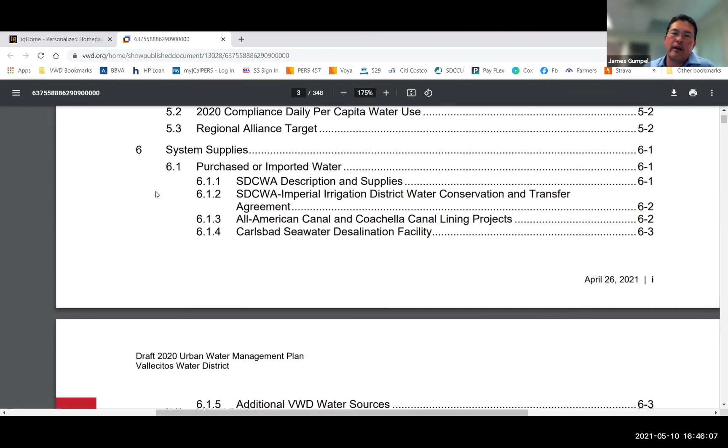It does, and I'll go to the chapter. This is really lifted from CWA's document, it's their document. There's been some criticism and comments on this document. Vallecitos put some comments in this document. CWA has addressed some of them, but not all.

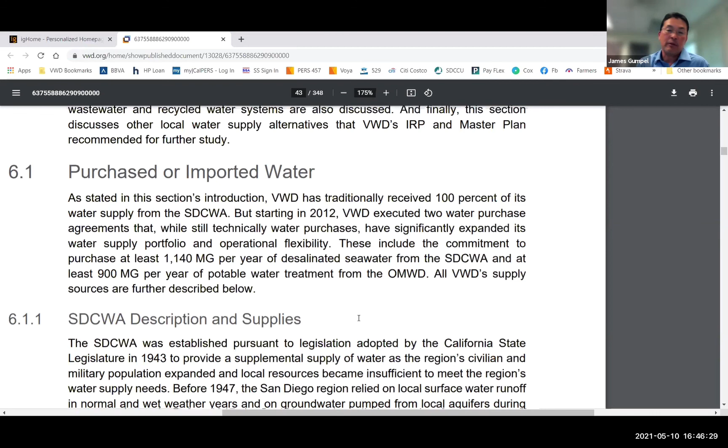But it does go through a description of supplies. It does talk about the new canal as a future supply, but it doesn't increase the overall supply. So I think a lot of the argument in the urban water management plan is, hey, it's the same supply, it's just a different road getting to the same place.

But the CWA document goes into more detail on the agreement, securing, and how much water is anticipated. It's an assumption, to say the least. But from a statute standpoint, all the CWA supplies are considered highly reliable sources of water with high priority as far as water rights go.

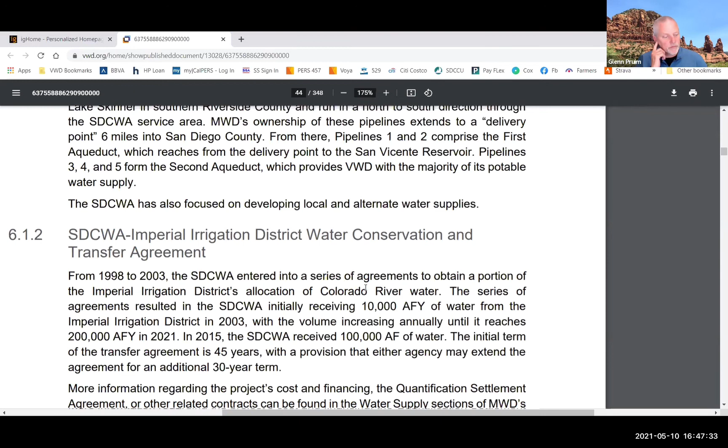Especially with the IID water. Yeah, half of the supply is high priority. You can see this is from the IID, the canal lining, and it goes into water. As you go down further, the supplies become more obscure, like groundwater banking and other high intensity supplies from a cost standpoint.

This document is online, but if you really want to get into it, the water authority's own document is much more detailed about their supplies. What we do in ours is take the general description of each one and put it in for our supplies, since we don't have any others. But the water authority drills down more into theirs.

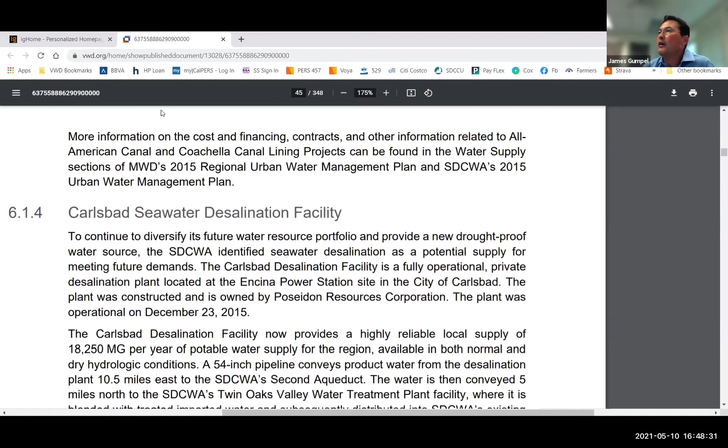What about the groundwater supply? We talked about groundwater supply in this document, towards the end of this chapter. We looked at the different studies, the existing study, and talked about it as a potential source of 250 acre feet a year.

So it's there, all right. It's not a high priority supply that we're counting on to meet our water demands, but it's identified in case we ever do move forward. It's in our back pocket.

Encina has it as a place to put the reclaimed water. The Encina and North County Recycle Water Coalition supplies are also in this document - given a fair amount of discussion. Our anticipated future direct potable reuse is in this document too.

But again, it's lower priority - we're not counting on any of that water to meet our demand. So they're not verifiable supplies, just planning. Exactly, and they're not required for us to meet our future demands, which is the good news.

Well, I'm sending Hal Martin a note to eat his words - send him a copy of this document and say, here it is. So, unless there's any other questions, that's pretty much it for me. No, I think that's it.